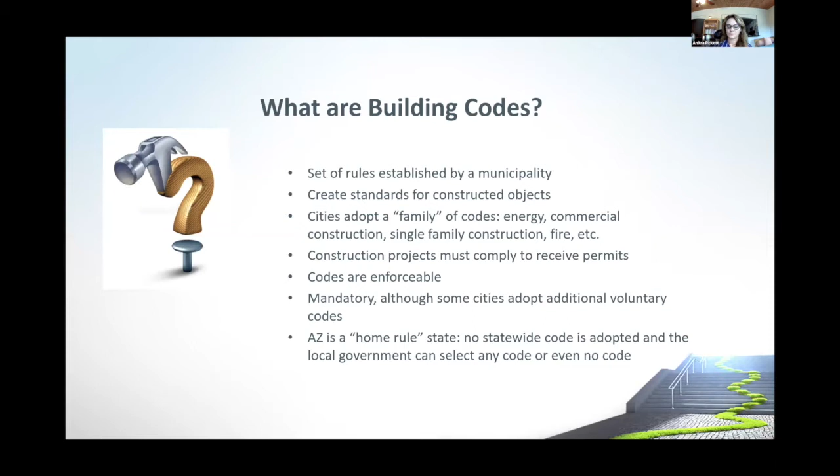One big question, and I think point of confusion with a lot of people, is what's the difference between green codes and green rating systems? If you think about codes, you can think about the IgCC or other codes like the IECC, or Cal Green's example in California, where they've developed their own building codes in-house. Now that's in contrast to something probably most of us have heard of, which is LEED.

The United States Green Building Council does the LEED rating system, which is one of the most popular rating systems. There are some other rating systems like Green Globes. The Living Building Challenge is one of the more aspirational systems. So it's important to differentiate these two green building initiatives when you're talking about them and trying to understand how to implement them. So we can compare them.

The codes are a baseline, they're minimum standards, so they set the floor on building practices, whereas the rating systems are more aspirational. The codes are a set of rules to abide by, and they're set up as model codes which cities can amend, whereas the rating systems are usually optional.

There are some municipalities that have made rating systems mandatory, but that's the exception to the rule. They're also set up with a system of prerequisites, so a lot of the rating systems have certain criteria you have to meet to be part of the rating system. Then you'll have options of how to receive points to achieve different levels. For example, LEED, you can achieve 4 different levels: certified, silver, gold, and platinum, done by voluntary choice of which points to gain within the system.

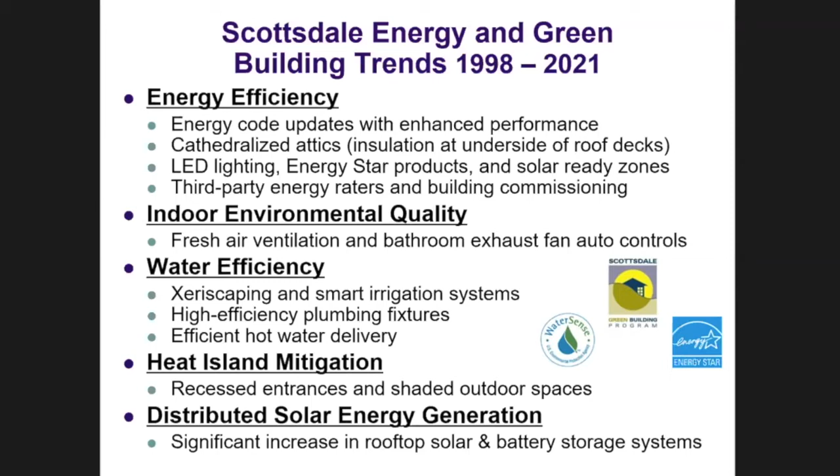And I give credit to LEED and the Rating and US Green Building Council for really getting the industry behind it and mainstreaming a lot of this. It's not all 100% mainstream, but most of it is. And the other important thing as part of this intro is that...

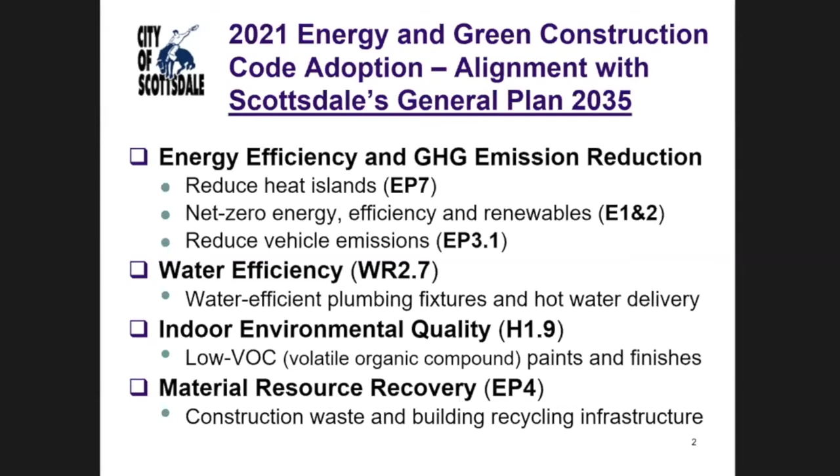Most cities, well all cities in Arizona, are required to have a general plan, and in that general plan there are usually sustainability items. In Scottsdale, we're working on our separate sustainability plan, but currently in our general plan we have things related to energy, water, environmental quality, and material resources. So this is really great justification for adopting the Green Construction Code because of these long-term city visions and goals, in order to translate that into policy, into building codes and standards.

Also nationally, just looking at the International Energy Conservation Code, there's really a lot that's been happening. We can go back to the 70s, but if we trace the evolution of the Energy Code, we can see that it's headed towards net zero energy. It is moving towards consuming less energy, becoming more energy efficient, and thereby giving it the ability to ultimately operate off of renewable energy, of course with appropriate technology such as battery technology.

I like to say that the green building of today will become tomorrow's building standard, and that's been demonstrated time and again. If we look at various other standards, where there's accessibility, water efficiency, there's a lot of things that have become incorporated into the codes. My take has always been that ultimately the green building will go away, green building codes will go away, because it will become part of mainstream construction and building standards. As I indicated, that's happening now.

I'm going to give some examples of these green component areas: site sustainability, water, energy, and environmental quality and materials, and give some examples of how these things are already transitioning into our codes and standards.

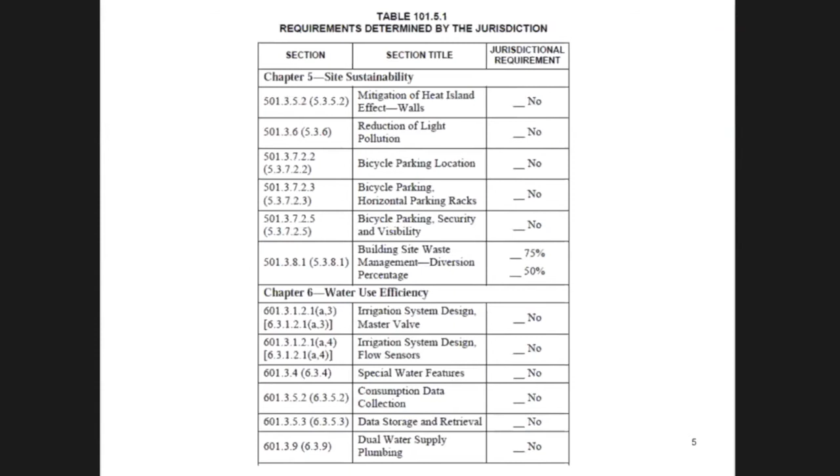So I gave an example of heat island mitigation for walls, but the base Green Construction Code talks about it for hardscape as well, and not only roofs—it requires it for roofs but also for hardscape. This is some of the crossover with the energy code, because the energy code has some requirements for cool roofs. So some of this overlaps between various codes, and you just need to make sure you're not conflicting with what's in those other codes or within the local planning ordinances, as I indicated.

Site water use efficiency irrigation systems is another thing that's very foreign for building codes, and usually it's going to be the water department handling this. In Scottsdale, as part of our effort to adopt the 2021 code, we're working with our water department to create the efficient irrigation system requirements. We already have a water conservation ordinance, but we haven't really gone into the details of designing irrigation systems. There are provisions in the IgCC, and our water department was interested and wanted to amend and modify some things, which is what you do when you adopt a code—you allow for local amendments. So that's what we're incorporating.

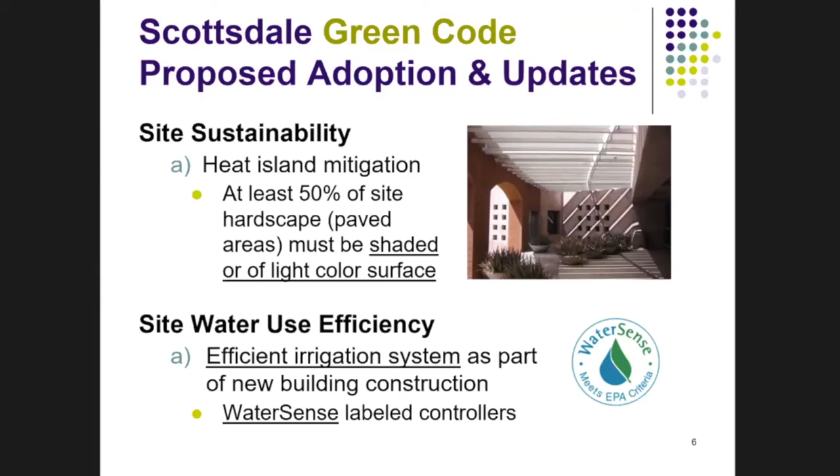In terms of WaterSense and indoor water use, there's a national standard for high efficiency plumbing fixtures, and this is an example where it interfaces with the codes again. The plumbing code actually has low flow plumbing rates, but WaterSense labeled fixtures have high efficiency requirements that are more efficient than low flow. This is something we amended our plumbing code with. Even though it's in the Green Construction Code, we didn't want to contradict what was in the plumbing code versus the Green Construction Code, so we amended the plumbing code. That's how these things are evolving over time.

So I just talked about high efficiency plumbing fixtures. There's also efficient hot water delivery, to ensure you're not wasting water waiting for hot water—that's something we actually amended in the plumbing code. It is in the Green Construction Code, but our approach is to not have conflicting requirements, so we amended our plumbing code to make it mainstream. And water bottle filling stations is in the IgCC, but we amended our plumbing code again to require water bottle filling stations.

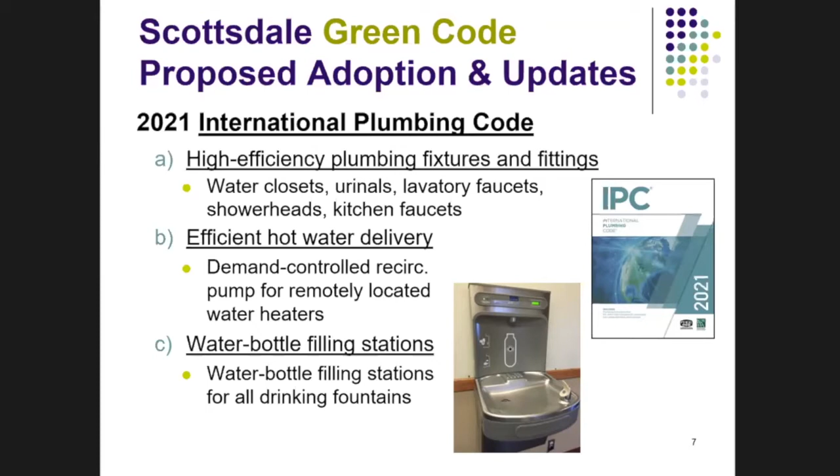And the International Energy Conservation Code is in the Green Construction Code, but it goes a step beyond. So with our amendments in Scottsdale, we decided to delete most of what's in the Green Construction Code and reference the Energy Code. There are a number of jurisdictions nationally that have adopted the 2015 and 2012 over the years, and some cities delete certain chapters because they feel satisfied that they're covering it adequately through their local adopted code or ordinances.

So these are the energy components under the IECC, and we're relying on this to really enforce some of the provisions in the Green Construction Code. So we're making some amendments to the IECC to somewhat reflect the Green Construction Code. And then the Green Construction Code, when we adopt it, we amend that chapter out. So a lot of integration that's going on here.

For solar, the Green Construction Code requires, well actually, this is solar ready zones. This is an appendix in the Energy Conservation Code, and we're adopting both of those for commercial and residential, and we're going to amend some of those numbers in terms of the 10% and 30%. So this is getting buildings ready for future solar by making them solar ready.

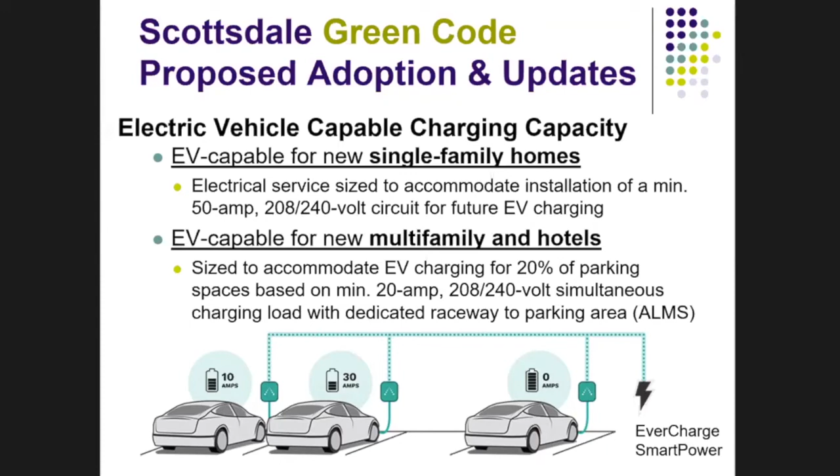And once again, credit to LEED and the US Green Building Council, because they really helped to pull the industry and mainstream many products and materials. So it's not like it used to be 10, 15, 20 years ago where it was hard to find particular products, and then there was a monopoly happening on certain companies and certain products, and then they would have higher prices because of that niche market. It's no longer a niche market. It has expanded. So we're keeping this in the Green Construction Code. There's really no appropriate place in the other building codes. So we're going to keep it there.

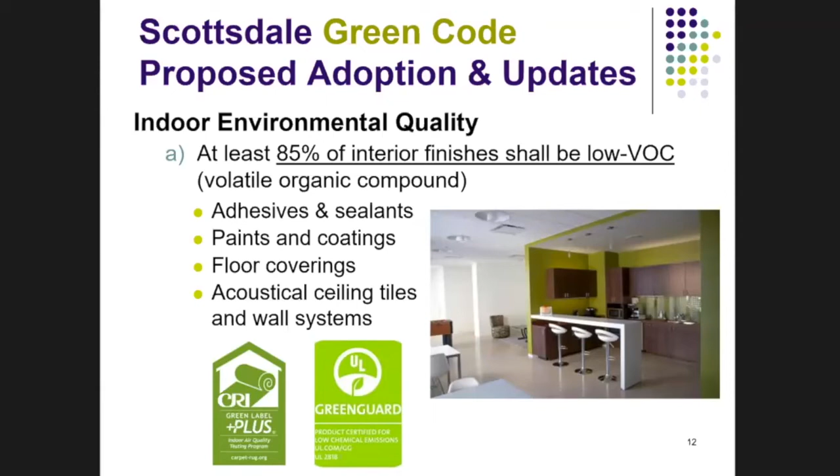Even though we're doing this now with the 28 projects that we've had over the last 10 years, it's different when you mainstream it. 28 projects compared to requiring everyone to do it is a big deal, and it requires the industry to tool up some. So we're looking at doing it by phasing it in over time. And Anitra has provided a lot of valuable information and research as we go through this process. So I really appreciate all the work she's been doing to help us put this together as a mandatory component.

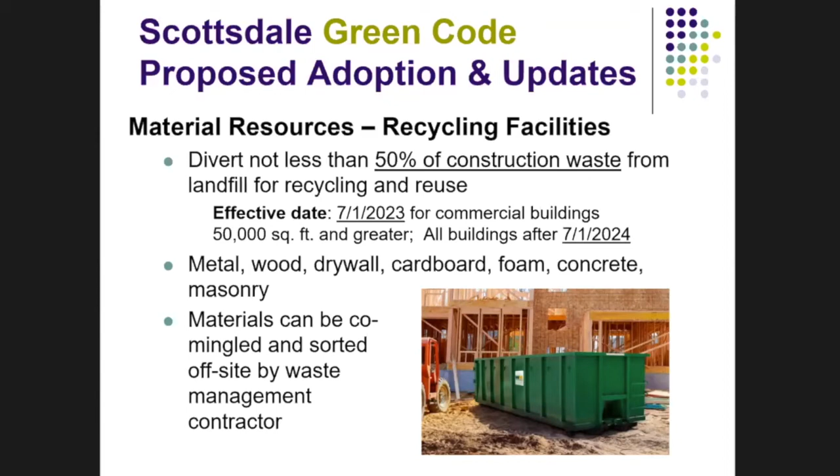But we also require, and this is an amendment in the Green Construction Code, that there's built-in pull-out kitchen cabinet bins for recycling and trash. This is a standard feature of most homes, and this is something we've been requiring all along as part of our green building program, as part of the green construction code, the 28 projects that we've had. Many of them are multifamily apartments. So we've been getting that in.

So now we're proposing to amend this, at least for the single family, into the residential code. That's where we're headed now. And then leave the commercial, because the green construction code is only for commercial buildings, including multifamily - we'll leave this requirement in the code. So we're kind of splitting it up depending on whether we're talking about single family or multifamily.

And then for actual materials that are used in the building, these are the percentages that are in the green construction code, and we're going to just stay with that and not amend it. And the IgCC requires that you comply with any 2 of these options. And actually there's 2 more after this.

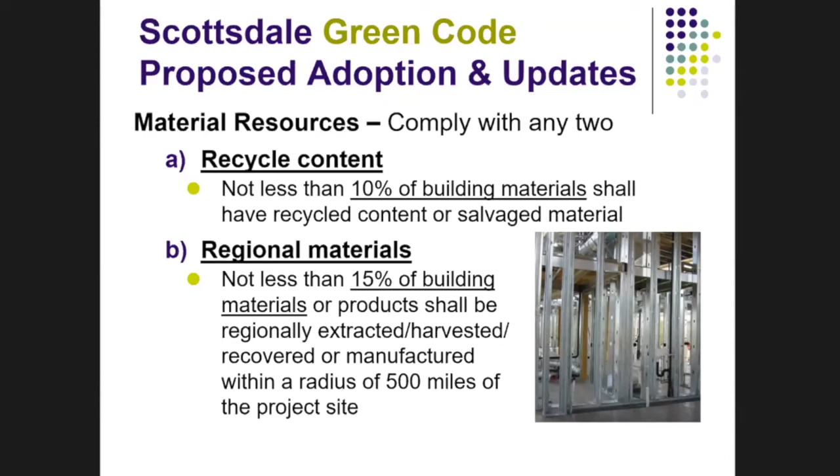Bio-based, and the previous one, recycled content, regional materials like concrete and masonry, and then multi-attribute materials, which means you have to have an environmental product declaration. So there's many paths here, and all of this is part of the green construction code.

It's different than the traditional codes. It's another layer. Once again, we're keeping this in the green construction code. We're not amending the building codes with this, because it's above what the regular building code would do. And so we feel that there are enough options here for applicants, builders, and designers to select from.

You look at the percentages, not less than 5% to be bio-based wood. They need to come from sustainably managed forests. So we feel that this is really doable as a mandatory code for all construction.

These are some of the projects that we've been enforcing the green construction code on. And as Anitra indicated, we use zoning bonuses. So this is something that we integrated into zoning. This is the way it has been.

And then we also recognize LEED and Green Globes as an alternative compliance path. So if a builder wants to go under a rating system, we will allow that as being deemed to be in compliance with the IgCC. And we're getting a lot of multifamily, some commercial, but it's mostly multifamily that we're seeing, including hotels.

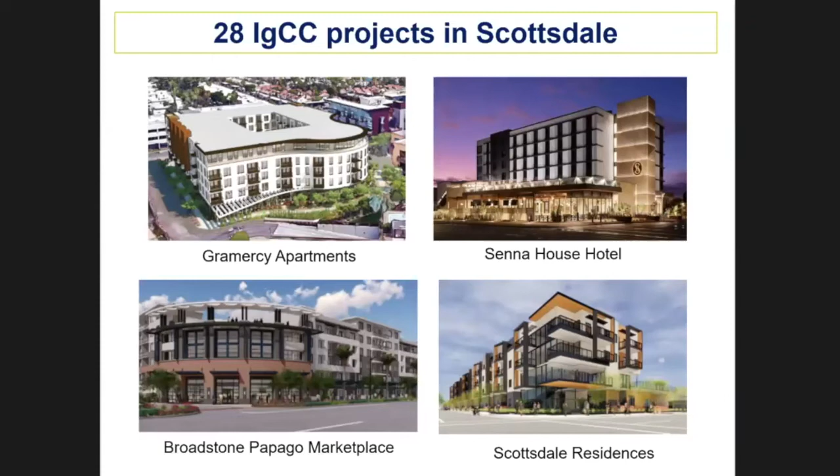So with that, I'm going to turn it over to Braden Kay, who's the sustainability director and doing some great things at the city there. So I'll stop sharing. Braden.

Thanks so much, Anthony, and just a huge thank you to both Anitra and Anthony. As most folks on the Zoom should know, Anthony's been an incredible leader in the green building space for many years. And I think the thing I want to personally note about the work is just how generous Anthony has been with his time, with us, with the city of Phoenix, with his volunteer contributions at the national level on the International Green Construction Code. We are so lucky to have a leader like Anthony, both at the national level and with all the support that Anthony lends locally. So Anthony, I know you've gotten awards and recognition for this, but it's important for us every time you speak to realize how lucky we are to have you here in the region and leading the way.

And I will definitely be popping a few sparkling waters when you guys get this mandatory code passed. That's going to be such a huge win, if and when that happens. And Anitra, it's very rare that we have a graduate student like you who really is pushing the field and creating a new nonprofit and trying to, as you create your own professional path, also do so much good in terms of your support of this work, both at ASU and with Scottsdale and with Tempe and other cities. So just really grateful for you hosting today, but also all the work you're doing to try to promote green buildings across the state and across the region.

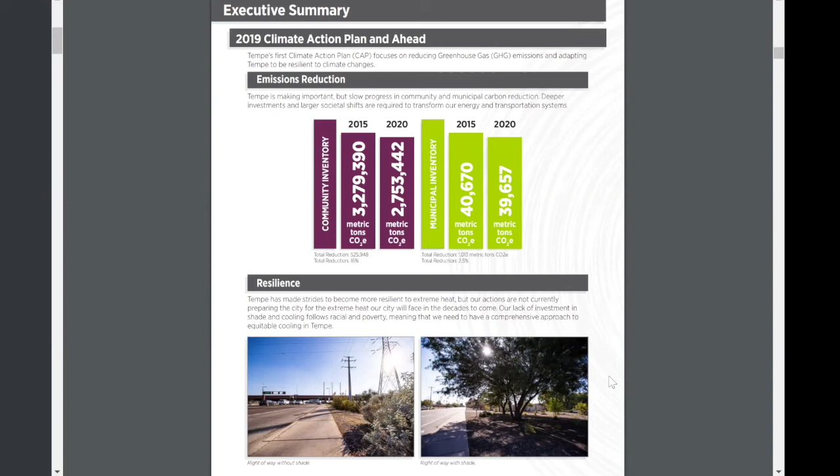In 2019, we did our first climate action plan and our first greenhouse gas inventory, and embarked on our first plan. The plan had both an emissions reduction component and a resilience component centered on resilience to extreme heat and motivating a more shaded, urban cooling throughout our city. In that first plan, our Sustainability Commission, who has been incredible leaders in this work, recommended 3 highlight actions. We originally had 4, and then we distilled them into 3.

One is the green codes and standards work that I'm going to talk about today. When we talk about green codes and standards, we talk both about green stormwater infrastructure standards, with which Scottsdale also has been an amazing leader, and the work that Tim Connor, Anthony, and others have been doing in the green stormwater infrastructure space, as well as the International Green Construction Code. We have this as our highlight action on resilience to extreme heat.

Even though IgCC obviously has a lot of benefits in all the different areas that Anthony has talked about, we wanted to promote IgCC as being a mechanism to support the built environment into investing more in cool materials, building orientation, and shading. At the end of the day, the reason IgCC is such an important policy tool, I believe, is because you customize it to your own city, and ideally to your own region.

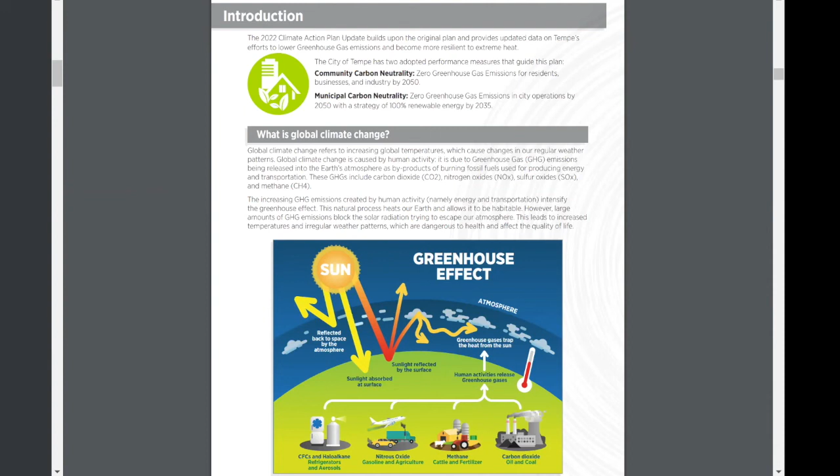That's the context in which we have to look at this heat issue—whether you believe it or not. Now we have more and more people in the region willing to accept that climate change is happening. Even if you don't believe in climate change, we need the entire region to believe in urban heat island, because it's true. The most conservative members we've talked to in our region are willing to admit urban heat island is real and needs to be mitigated through changes in the built environment. So we have a real opening here to talk about both green stormwater infrastructure and building code as critical to changing the shape of our urban heat island profile.

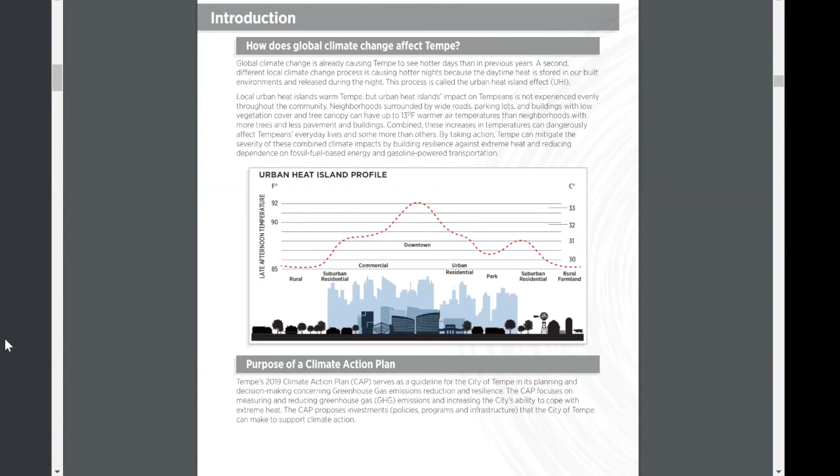For those of you that experienced the summer of 2020, that really was the summer that told us what the future was going to look like. And the future looks deadly. The future looks expensive. The future looks bad for business. The future looks bad for public health. We know that 2020 is going to be what the future looks like—very likely an average future in the 2040s, and definitely in the 2050s.

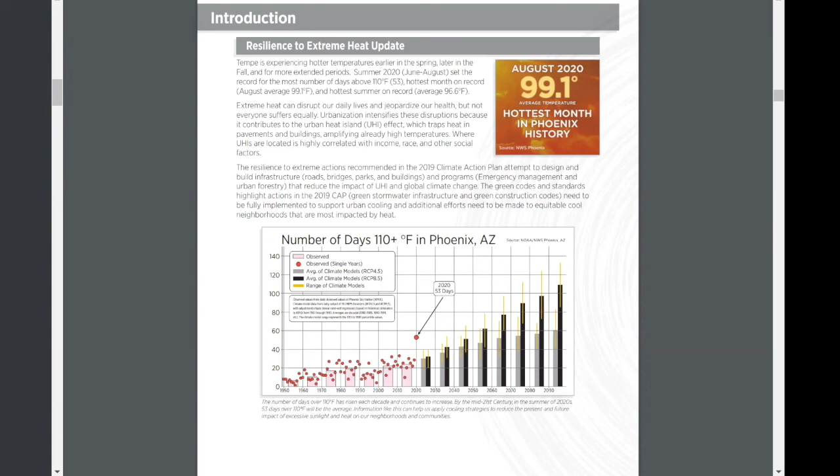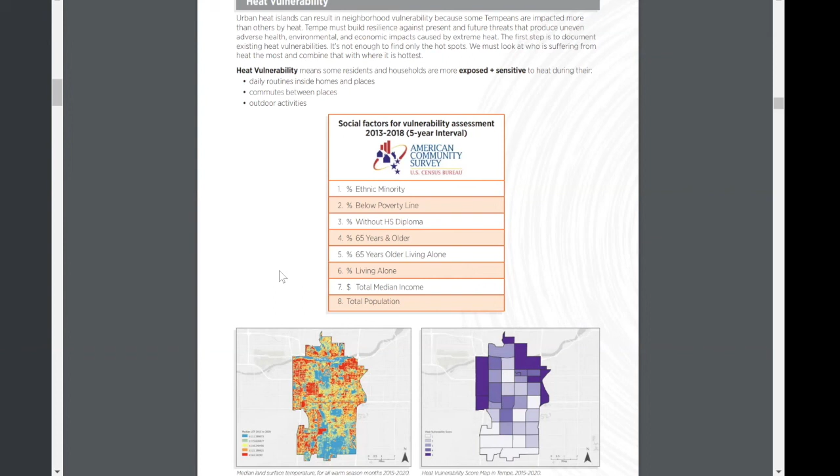We can at some point have a longer conversation about the need for discussing heat as a social justice and racial justice issue. Tempe has mapped how heat is showing up in the city. We have maps showing how heat shows up where we have the most vulnerable, and it's a really important aspect to how we think about heat.

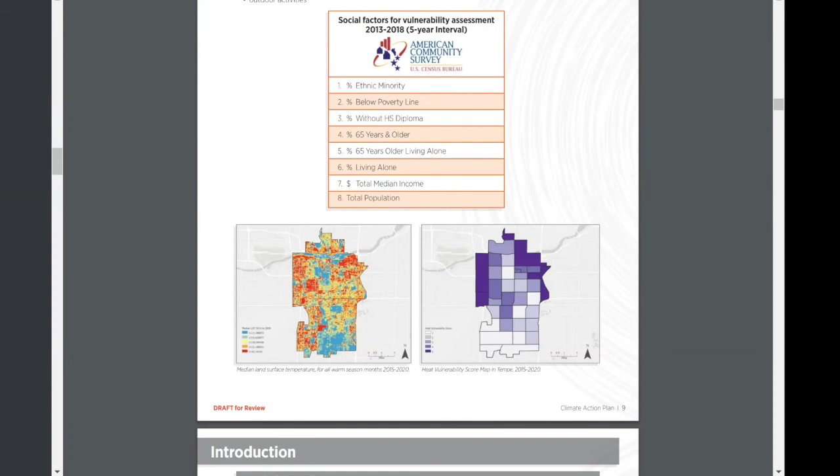But let me get to the building code and how we're thinking about it. We're at a very early stage. We are building 3 city buildings using the IgCC, and our mayor and council will be considering in the next several months a city building policy that mandates all future city buildings be built with the IgCC.

We now have a fully funded FTE line in our community development department. We haven't hired that person yet—we've been using that money to hire one of the consultants Scottsdale uses to help us with our own Tempe green code and adopting that. But we do have a line item for a full-time position to help us move forward.

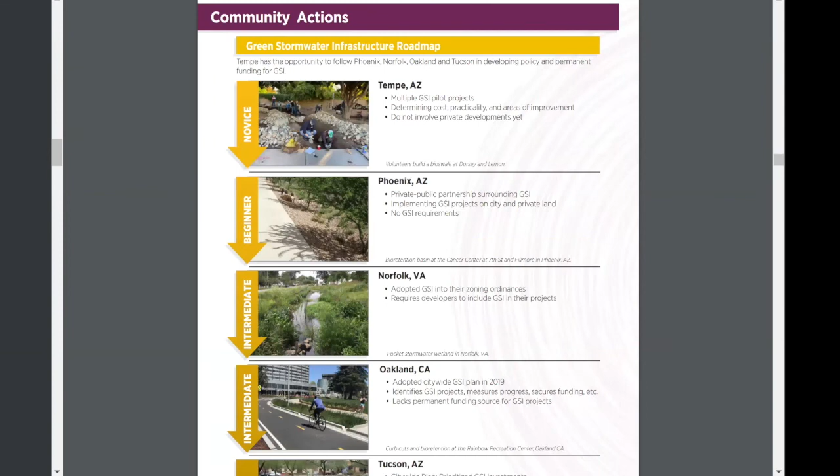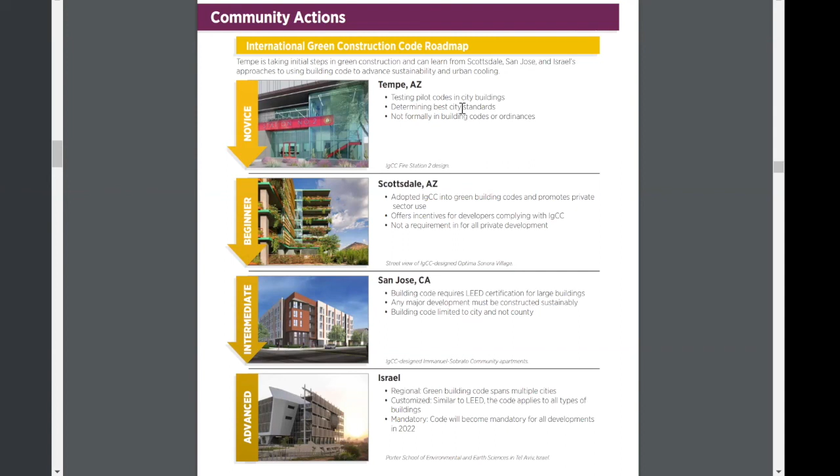We've been building 3 city projects—a public works yard, a public pool community center, and a fire station—all under the checklists of the 2015 IgCC. So the way we view the work right now is we're testing pilot codes in city buildings, that's what we're doing with those 3 buildings. We're currently working on creating our Tempe version of the IgCC, but it's not yet in our codes.

When you look at Scottsdale, they're about to jump from beginner to intermediate or advanced once they have their mandatory code. They have IgCC in their green building codes, and they've been promoting private sector use—the 28 buildings you heard about. They've been offering incentives, but they don't yet require it for all private development. That's what's holding Scottsdale back from being even more of a leader in this space.

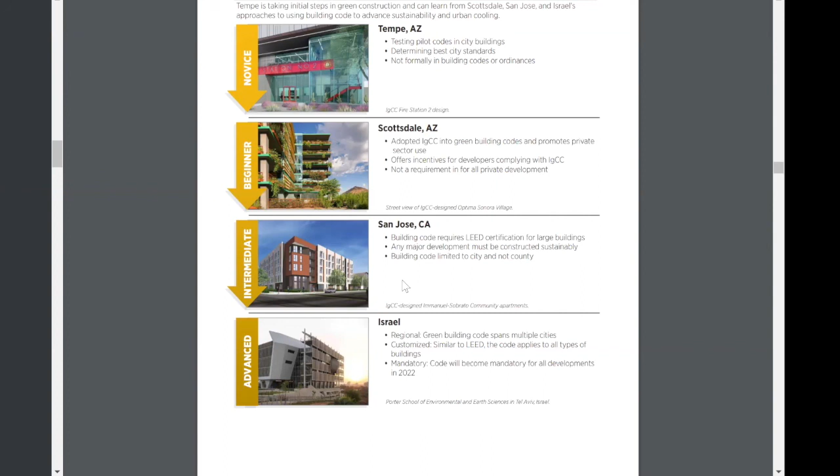Then we see San Jose, which does require green code for all city buildings, but it's only limited to the city. The place we've found with the best comprehensive approach, and really where I think our region needs to go, is Tel Aviv, which has a regional building code covering multiple cities. They've customized that code so it adapts to all types of buildings and is adapted for their region. And this year, it's going to become mandatory.

So when we think about where we really need to go for widespread adoption, where the building code could be a critical solution for resilience to extreme heat and other sustainability challenges, we need regional, customized, mandatory codes. We're not there yet—we need to understand where we are now and how we get to where we could go.

We would not be anywhere close to this trajectory without the amazing leadership of Scottsdale and all the work Anthony and the team have done there. My hope is with Tempe's work—we're never going to lead on this, we're at least 10 or 15 years behind Scottsdale—but we're starting our pilot projects and getting momentum going. Our hope is we're creating a culture within our city government, and with our development community, where the International Green Construction Code is seen as the way to go and good for business as well as development.